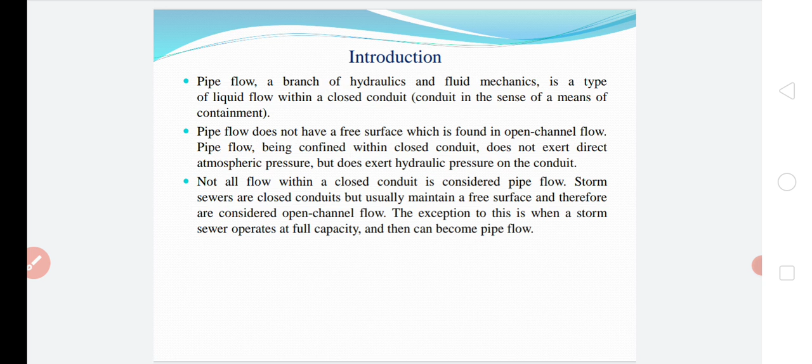Now, laws of fluid friction. Actually, the characteristics of laminar and turbulent flow are very different. To understand why turbulent or laminar flow is desirable in the operation of a particular system, it is necessary to understand the characteristics of laminar and turbulent flow.

Laminar flow I have already discussed in the previous chapter, what is laminar flow and how the flow pattern arises in laminar flow in terms of cross section. I have already discussed this, but in this particular chapter I will again describe the different manners of the flow pattern in laminar flow.

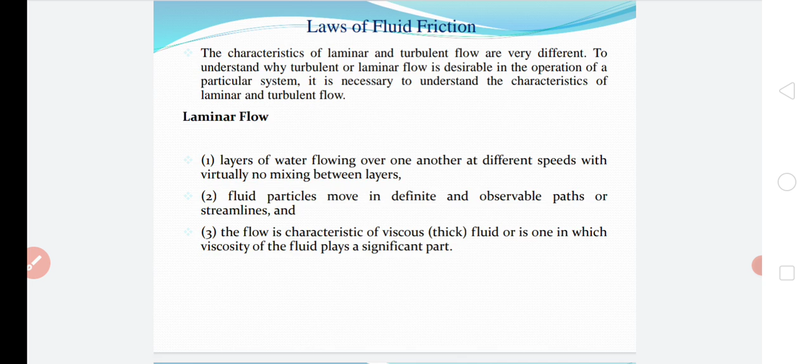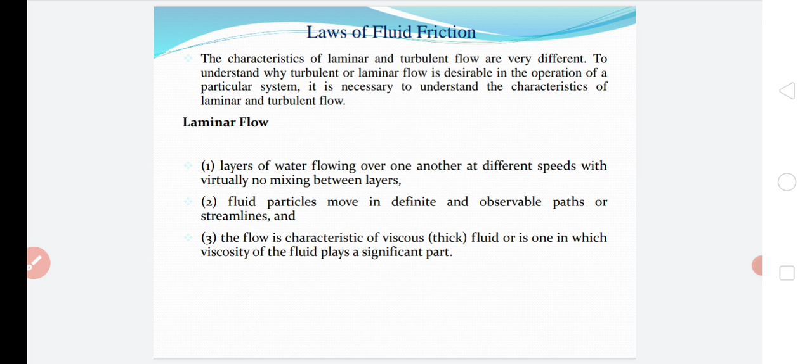So layers of water flow over one another at different speeds with virtually no mixing between layers. That means if we consider this flow pattern of laminar flow, all the particles proceed along smooth parallel paths and all particles on any path will follow it without deviation. That means they cannot cross each other. One particle can't mix with another particle, so there is no mixing between layers. Fluid particles move in definite and observable paths or streamlines. This flow is characteristic of viscous fluid, one in which the viscosity of the fluid plays a significant part in laminar flow.

On the other hand, in turbulent flow, mixing arises between the layers. This is the main keyword of turbulent flow. Suppose this is a bathtub, and in the center position we place a cup, and from above we pour water from this mug. What happens when we pour water from the mug - there is laminar flow considered, and after pouring into the cup, the fluid mixes in different manners, as shown in this picture.

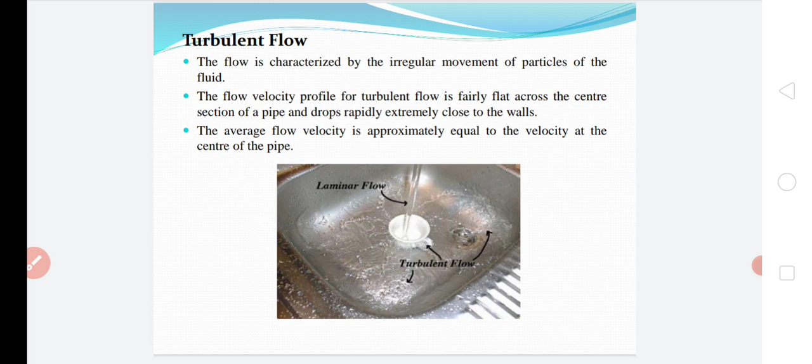So here the average flow velocity is approximately equal to the velocity at the center of the pipe. In this particular figure, there is a flow pattern showing mixing between different layers. So here we cannot differentiate every single layer. So mixing happens particularly in turbulent flow.

On the other hand, there is transitional flow. This exists in between the two flows, that is laminar flow and turbulent flow. In this region, the flow is very unpredictable and often changes back and forth between laminar and turbulent states.

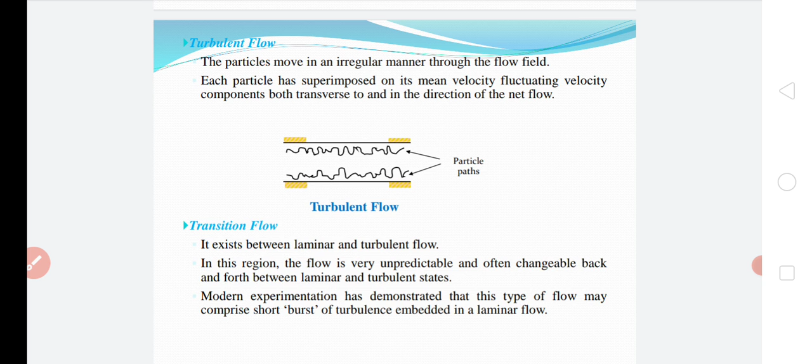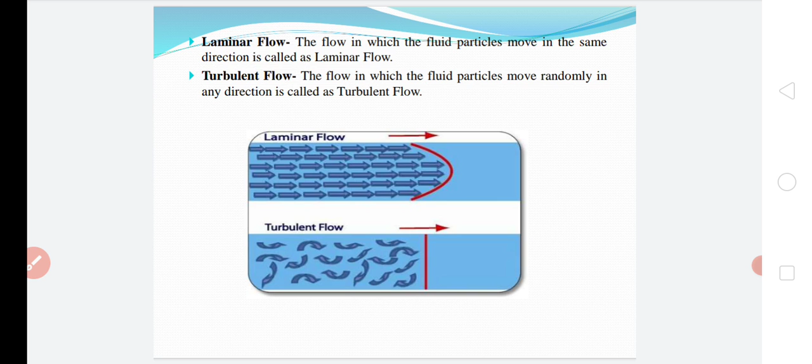In this particular figure, we elaborately show the parallel lines of laminar flow. In the figure below, there is turbulent flow, where different particles mix with each other or with each other's layer. So there is turbulency occurring in turbulent flow.

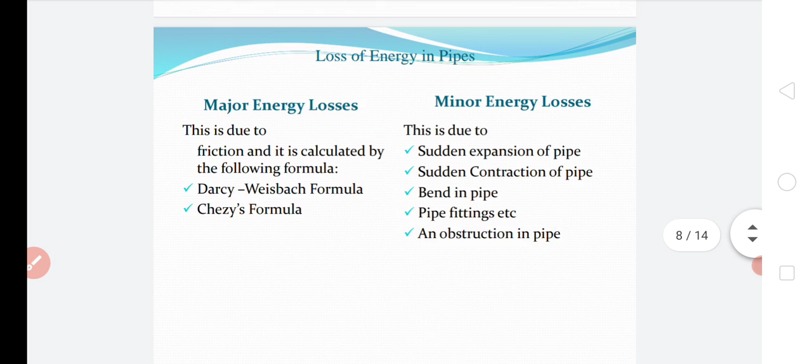Now, loss of energy in pipes. There are two types of losses in this particular flow, or flow through pipes. What happens in this particular case? There are various types of losses in flow through pipes. What actually happens is that there are two types of losses.

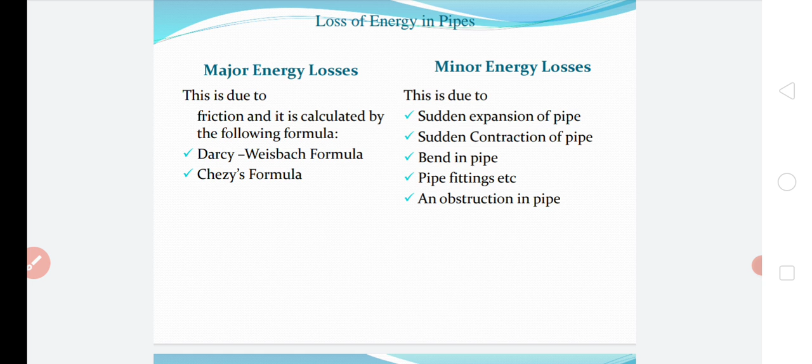Why is it called major energy losses? It is due to friction, and it is calculated by two formulas: the Darcy-Weisbach formula and Chezy's formula. On the other hand, minor energy losses are due to some features of the pipe, such as sudden expansion of the pipe, sudden contraction of the pipe, bend in pipe, pipe fittings, and obstruction in the pipe, etc.

Now we discuss the major loss. Why major loss? When fluid is flowing through a pipe, the fluid experiences some resistance, as we have already said, due to which some energy is lost. The major loss is due to friction with the wall of the pipe.

The major loss is determined by the Darcy-Weisbach formula: HF equals 4FLV square upon 2GD, or we can write FLQ square upon 3D to the power 5, where HF equals head loss due to friction, L equals length of the pipe, V equals velocity of the flow, D equals diameter of the pipe, and Q equals discharge of the fluid.

And small f, that is the frictional resistance or coefficient of friction, may be written as 0.079 by Re to the power 1 by 4, or Rn to the power 1 by 4, that is the Reynolds number.

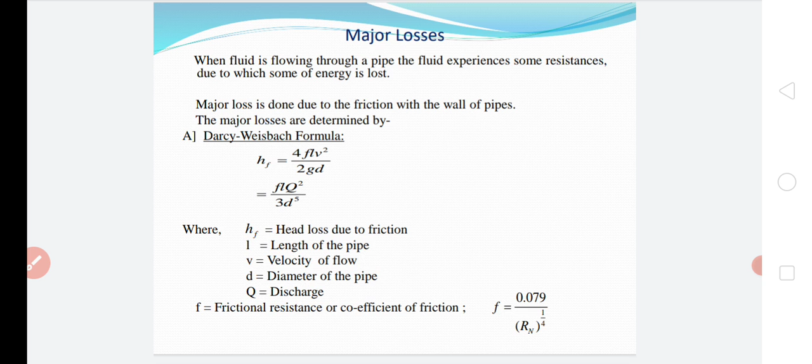Now the second formula is Chezy's formula. By this formula we can also write HF, the head loss due to friction, equals 4FLV square upon 2GD. We can also write this as 4FLC square MI upon 2GD, where V equals C root over MI, meaning V square equals C square into MI.

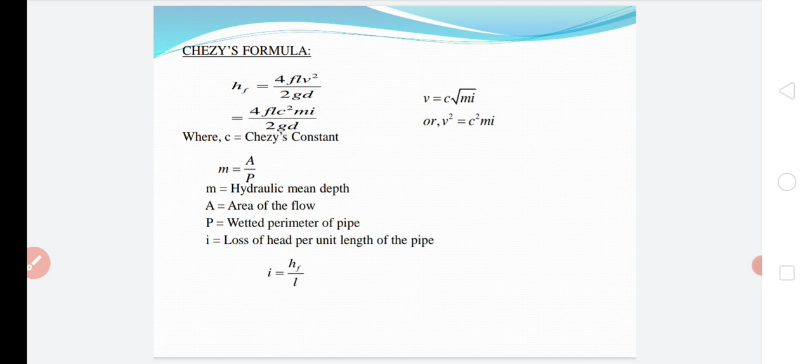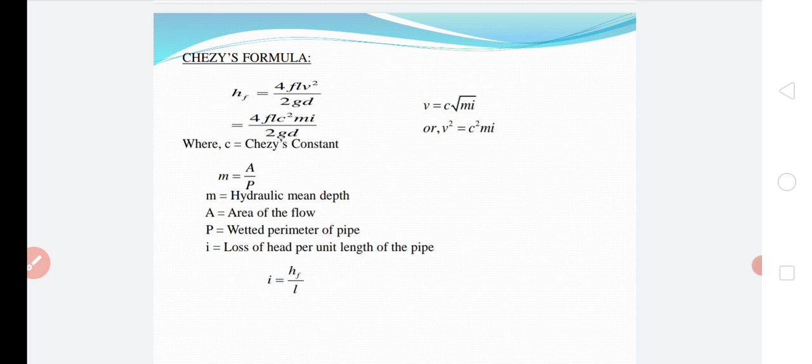Where HF equals head loss due to friction. So if we find the head loss due to friction HF, we can write HF equals I multiplied by L, that is I into L.

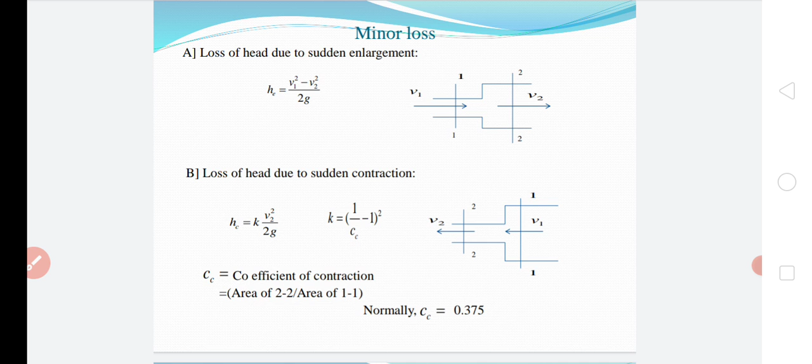Now, what is K? K equals 1 by cc minus 1, the whole square, where cc means coefficient of contraction - that is the area of section 2 upon area of section 1. Normally cc is considered as 0.375.

Loss of head at inlet of pipe or entrance - that is the inlet. If the flow is just passing through an entrance, just starting, then there is a head loss, which is HI. We can't write HE because HE is already considered as sudden enlargement. So here HI equals 0.5 into V2 square by 2G.

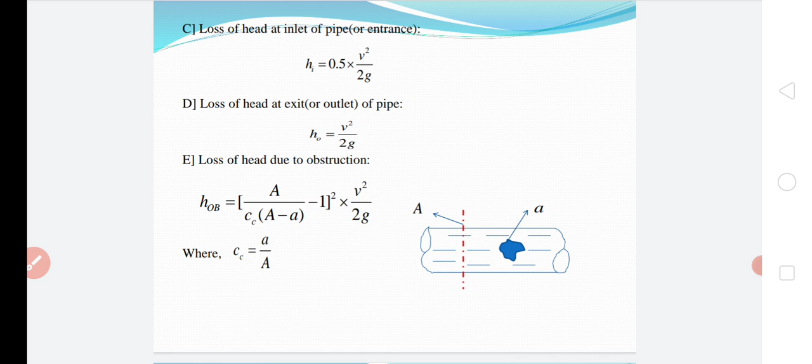Where CC is the coefficient of contraction, as already discussed - that is the area of the obstacle or obstruction upon the area of the cross section of the pipe.

Next topic: loss of head due to bend in pipe. Suppose a pipe suddenly bends at some point, which may be 30 degree, 45 degree, or 90 degree. At that section, HB equals K into V square by 2G, where K is the coefficient of bend, depending on the angle of the bend - it may be 30 degree, 45 degree, 90 degree - as well as the radius of curvature of the bend and diameter of the pipe.

And lastly, loss of head due to various pipe fittings. Wherever pipe fittings are done, or wherever we use a valve, in each such section we get different head losses. So here, head loss due to pipe fittings, HP equals K into V square upon 2G, where K equals coefficient of pipe fittings.